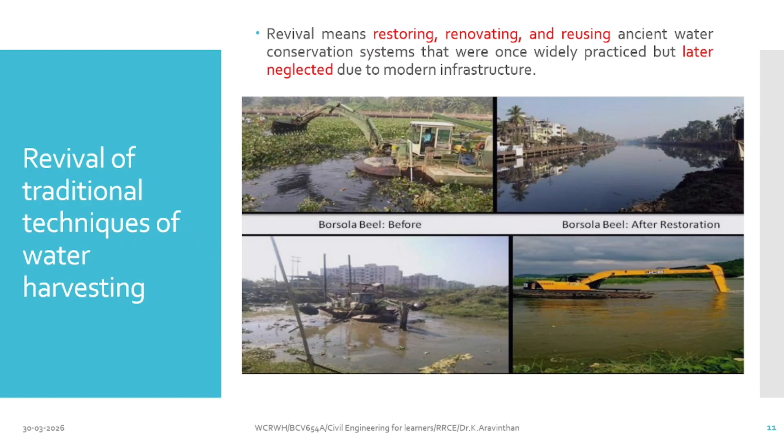I have told you a number of traditional structures are there in India. Which state has more water harvesting structures? You see here, you see the numbers. These are the states, these are the number of structures. Sir, in Karnataka they say Kere. In Kerala if you go, there is a word called Surangam. They say it as that. In Andhra Pradesh they say it as Cheruvu.

Everything is the same. How much they have constructed: West Bengal is the place where you have 1 lakh ponds. That state is the leading state. Don't think that the well-developed states are only in South India. West Bengal has a large number of water harvesting structures, more than 1 lakh ponds. Who is second? Rajasthan. In Rajasthan, what are the names of the structures? Johads, Baolis, etc. These are the different names. This I discussed in the previous class. 50,000 plus ponds are there.

Who is number three? Third is Telangana. So now come the South Indian states: Telangana, 40,000 plus. Tamil Nadu, they say it as Eri. In Karnataka they say it as Kere. 30,000 to 36,000 Keres are there. Karnataka is the fifth state. You see West Bengal here, is it that green color? What is in brown and light brown color? These are the places where we have water scarcity. Can you see Karnataka has two colors? Dakshina Karnataka, where we are here.

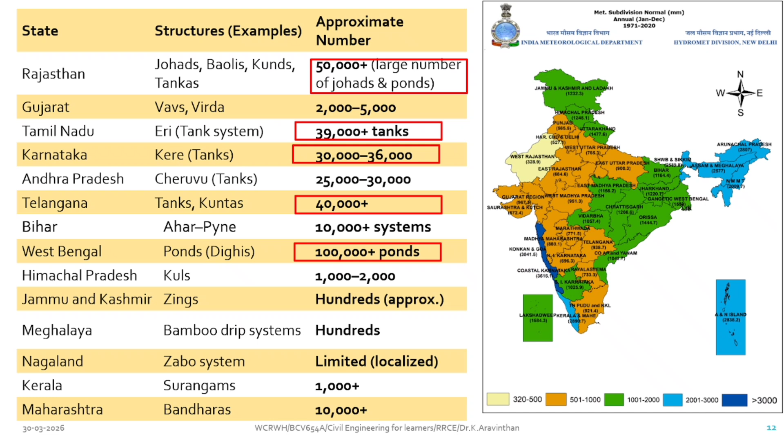One thing is 328 mm of rainfall, which is called the Thar desert. These places where you don't have much rainfall, this is a Rajasthan place. East Rajasthan has a high amount of rainfall, and this is a statistic which is taken from water conservation metadata. You have the water body census. They are the organization. They take the water body scenarios throughout India.

Which state has the highest number of water bodies? I have told West Bengal. How many ponds do they have, you know? Around 7,47,000 ponds till date they have. Which are the states in the list? West Bengal; Uttar Pradesh has 2,45,000 ponds. Next, Andhra Pradesh has 1,90,000 ponds. Still they are a water-scarce zone.

Now, which states have the least water bodies? They don't even have water bodies, or very few: Sikkim, Chandigarh, Delhi and Arunachal Pradesh. So we are not in this zone. We have a number of water bodies. Now, what is water encroachment? They will construct houses. They will construct some activities in the water bodies.

In which states are these higher? Uttar Pradesh. Nearby Uttar Pradesh, what do you have? Delhi. In Delhi, you have the highest number of encroachments. Next is Tamil Nadu. We will give some bribe to politicians, then we will construct near the pond, then we will be making apartments. These things are happening in Andhra Pradesh. Andhra Pradesh is third. All India, these are the three states with encroachment.

But in Bangalore, they are constantly monitoring. If anything is happening, immediately they will destroy it. BBMP people are doing it. Recently, in 2024, in RR Nagar, encroachment was removed by the BBMP people. We have ponds around 60%. Water conservation is only 9.3%, what we are building in structures.

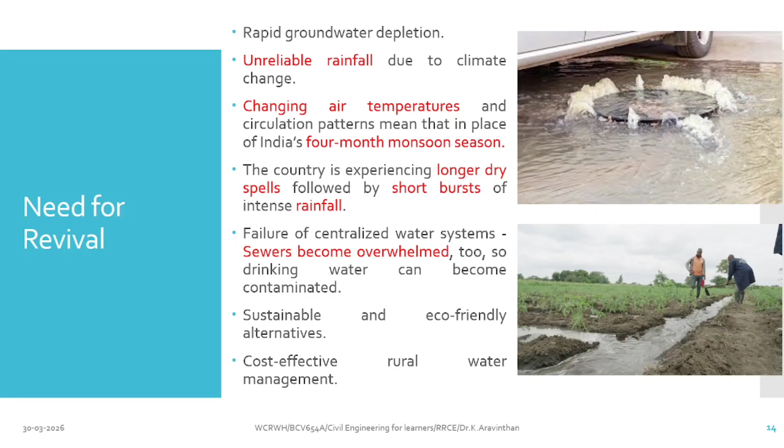On June 1 the monsoon is going to come. As a government, in May itself, they have to take a JCB. Wherever there is water flow, they have to take all the silt, sediments and dust particles away from the channel. Then only the water will move freely and infiltration will happen. If we are not doing it, that water will go into other places where it cannot be stored. Do you understand? These things they have to do before the monsoon.

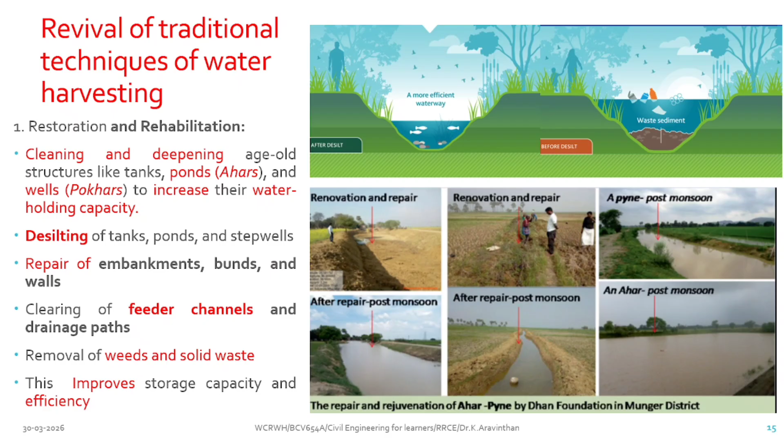What is the need of planting trees along the river? Sir, we are planting the trees in the land, okay. But why do we need to plant trees along the river? What will happen? It increases the roots. If roots are increased, what is happening there? The roots will allow some place to infiltrate, no? The water will infiltrate automatically.

You need not make a bore. You don't need to make a pit there. If you plant a tree, that tree will make the path for the water to infiltrate inside. And also it will catch the soil. Otherwise the water will take that rich fertile soil and go. So if trees are there, it will hold the soil also. It will not leave the fertile soil. So soil is being preserved and groundwater will improve. These two benefits are being received by maintaining the river places.

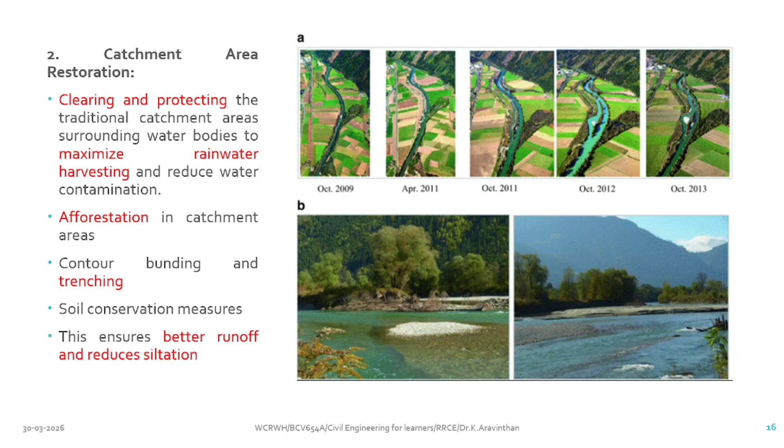Wherever you see there is a water path, you have to plant. This has been done by the government. Can you see? Along the side, they have done afforestation. What is deforestation? Cutting. What is afforestation? Planting. Where should we plant? Along the river side. Can you see? On a number of river sides, afforestation is being done. This has to be done to improve or revive. Contour trenching has to be done. With soil conservation measures, runoff will get reduced.

Kedarnath is a place where the temple is constructed in this kind of a place. Here, what will happen if there is any heavy rainfall? The rainwater will go along Kedarnath and it will wash away. Do you understand? So what you have to build is an embankment. If you are constructing an embankment, the water will not wash away and it will not be flooded.

It has to be made village maintenance, community-led management. These things can be done. NCC, NSS clubs are there. Don't always think that removing the plastics and clearing the shrubs is the only activity. What you can do is, planting this kind of trees along the river is an activity you have to do. Common people don't know. NSS students will do it. School students also are doing it, no? NCC, NSS, school students also do.

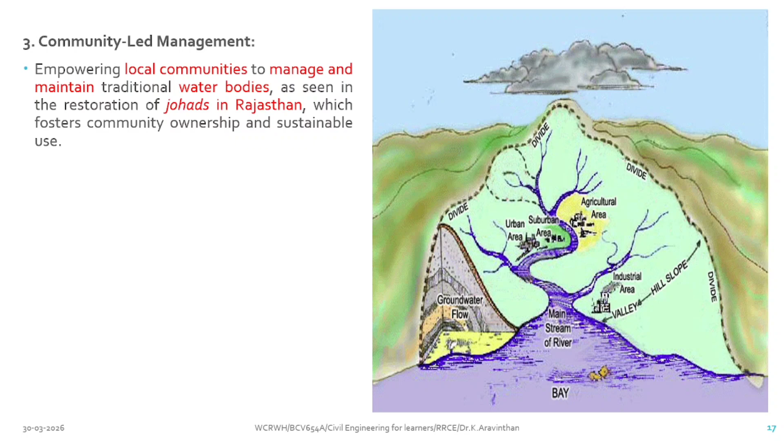But as an engineer, what initiative you have to take is a technical initiative: how to build rainwater harvesting in a village. Sir, we already know the traditional method. What you have to do is integrate it with rainwater harvesting. This is a simple idea here. The traditional water harvesting system is called a well. Sir, near the house you have a well.

If I am constructing rainwater harvesting, that water can be stored in small containers, a 2000 or 3000 liter container. After filling that, it has to go to the wells. Automatically, if it is overflowing, can you see here? There is a storage here. After it stores, the overflow should go to a well. Are you constructing a well? No, you are not constructing. They might have been constructed 100 years before. What you have to do is construct a small storage tank. After the rooftop water fills it, you can take it away to the well.

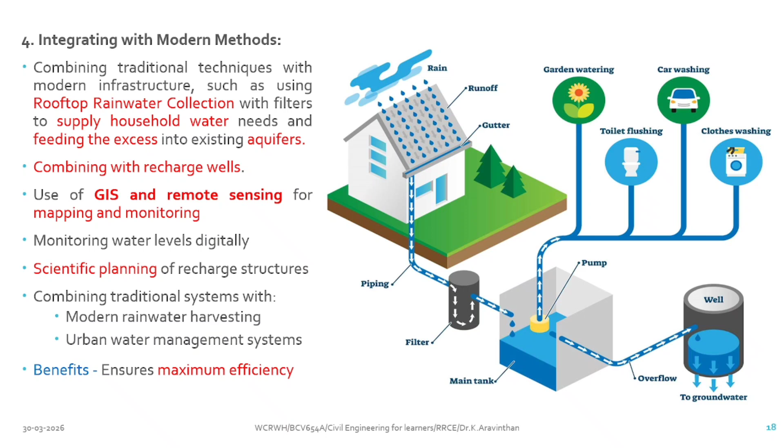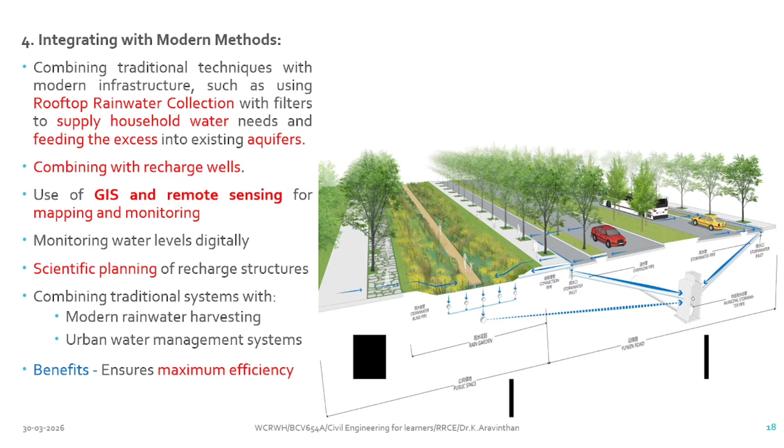The same way, in a place you can use integration of GIS techniques. By using global systems, you can monitor the water and make a scientific plan in order to store the water. So traditional and modern systems of rainwater harvesting. Also you can collect all the roadside water into a common water storage system. Watershed area. Sir, in a hilly place, how they manage water is like this. What is the name called?

Ruza system. It's been followed in hilly areas. These are the hilly places. Automatically the water will store at different layers and you can use it for further purposes. So construction of low-cost khadins and this Ruza system can be constructed. In Coorg this system can be adaptable.

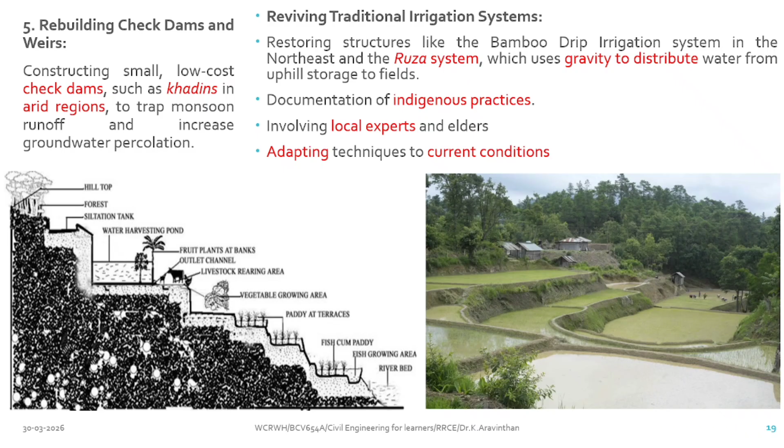Sir, in Coorg you cannot construct a well. You can construct this kind of Ruza systems, and this kind of indigenous practice. The Ruza system has been used in uphill places, storage fields. Examples of Baolis and Jhalaras, and these have been found in South India as well as North India.

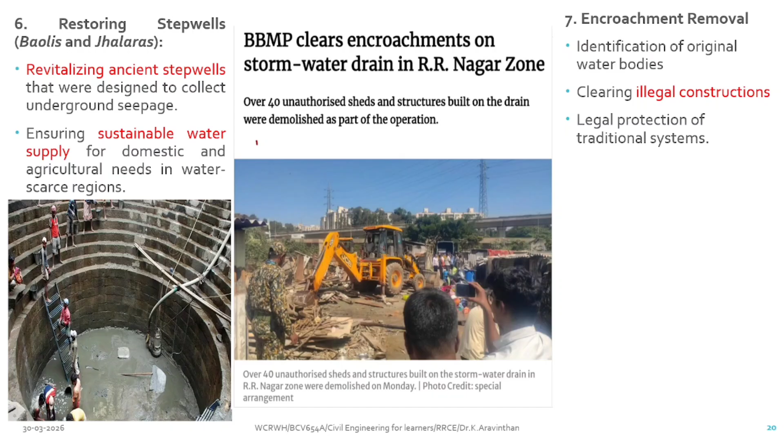Next thing is encroachment removal. I have told BBMP has removed the encroachment. Over 40 unauthorized sheds and structures which are built on the drain were demolished as a part of the operation. So in Bangalore it has been recently done in 2024. This encroachment has been removed. And it is not only removing, those people have to be identified and the necessary housing has to be provided.

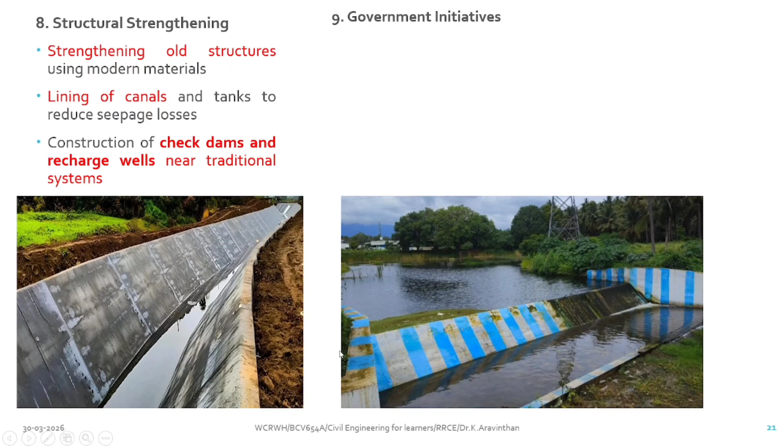Now government initiative: not only individual level, community level, now comes government level. The initiatives they have done at government level: MGNREGA, Mahatma Gandhi National Rural Employment Guarantee Act. It's a 100 days program for rural people. Revival works are being done by these people, and the rural people help renovate the existing tanks and existing ponds. So this way the government is providing a key initiative for recovery.

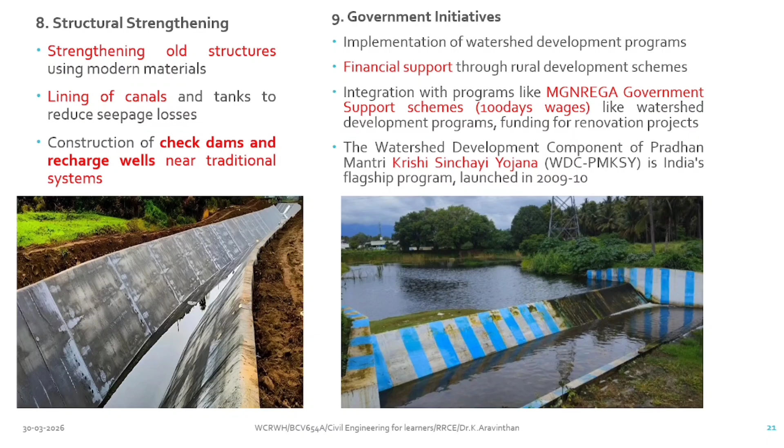Then Pradhan Mantri Krishi Sinchayi Yojana was launched in 2009-10. This program gives 60-40 percentage in case of states and 90-10 percentage, 90 percentage central government, 10 percentage state government. This kind of initiative is given for watershed development or water reviving programs, and they provide 50 or 60 percentage of funds if they are purchasing a drip irrigation system. These yojanas are being initiated in order to help the farmers restore this activity.

Now, the challenges: urban encroachment is the key challenge here, land encroachment where the water cannot be stored. Next thing is loss of traditional knowledge, where earlier they used to have good water knowledge in ancient times. That traditional knowledge is being lost now; modern technology does not have a complete system. The awareness among people is very less, so they are not much aware to preserve the water as was done in the traditional system. So this creates loss of traditional knowledge.

Whatever they have practiced, we are not practicing. The traditional system follows a practice for water conservation; that is not being followed now. And the poor maintenance, the policy and infrastructural gaps. Even though this many schemes and facilities are there, still some policy gaps have to be filled. Necessary action has to be taken at different levels in order to meet the requirement for the revival of water conservation techniques.